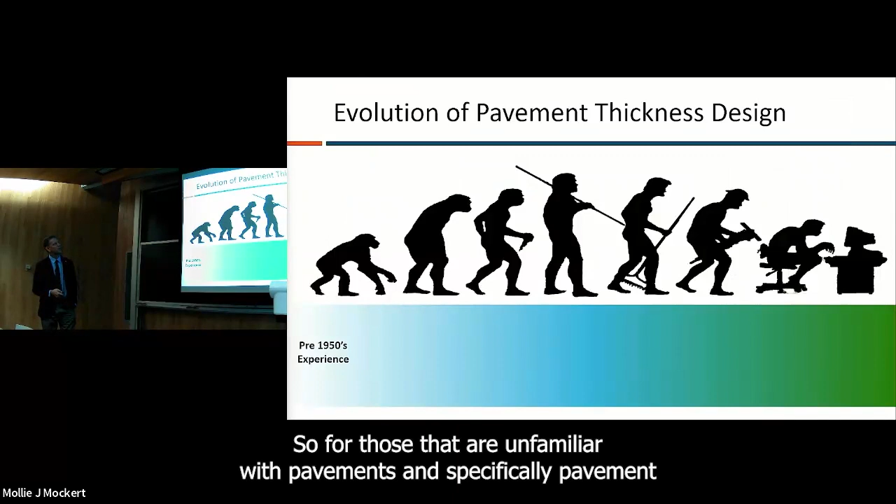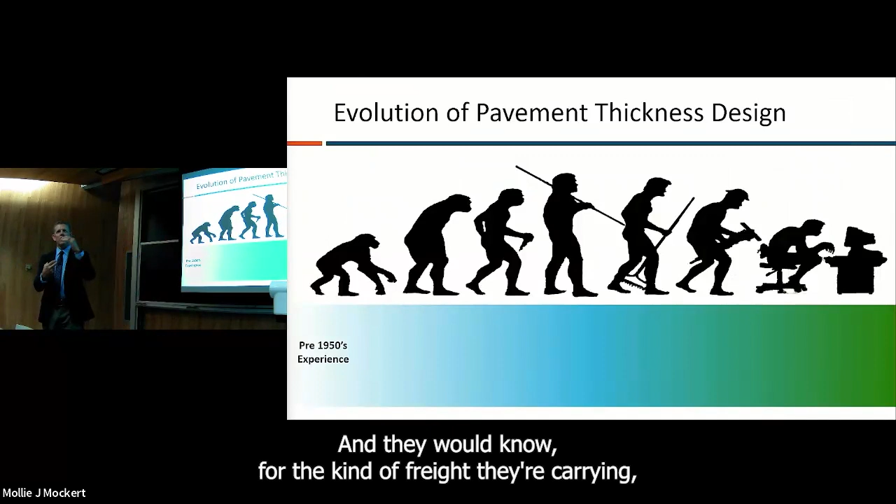For those unfamiliar with pavements and specifically pavement thickness design, we can think of it on an evolutionary scale. Before the 1950s, it was really based almost exclusively on experience. You had local engineers, mostly geotechnical engineers, who had a general idea of their soils and the kind of environment they're dealing with. They would know for the kind of freight they're carrying, okay, we need 5 inches of asphalt over some base material over the soil, and that would probably do the job.

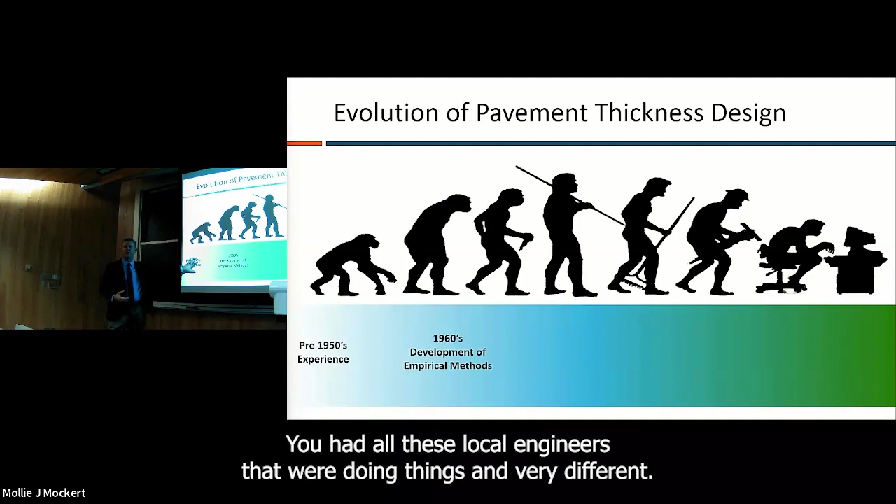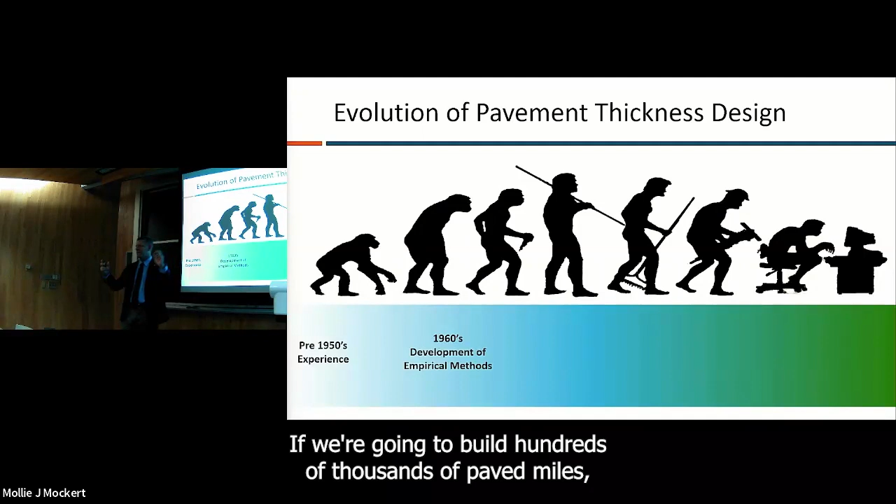Then in the 1950s, we had the Eisenhower Interstate and Defense Act, which paid for our modern day interstate system. And in classic federal government fashion, they had all this money that was going to go into the interstate system, but they did not have a design system. You had all these local engineers doing things very differently, there wasn't a national design standard. So there was a need to develop some kind of design system. If we're going to build hundreds of thousands of paved miles, we need some standard to do it to, and it did not exist when that money was first made available. So there was a big road test, and I'll talk about that in a minute, to help with that.

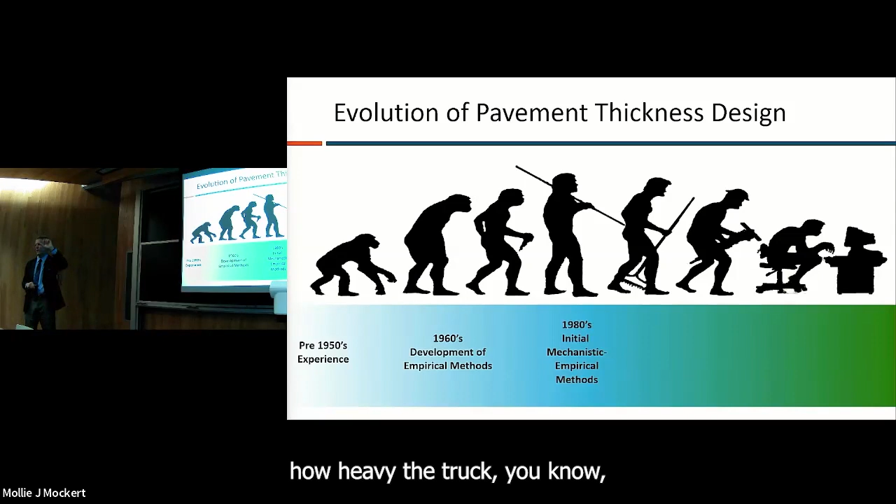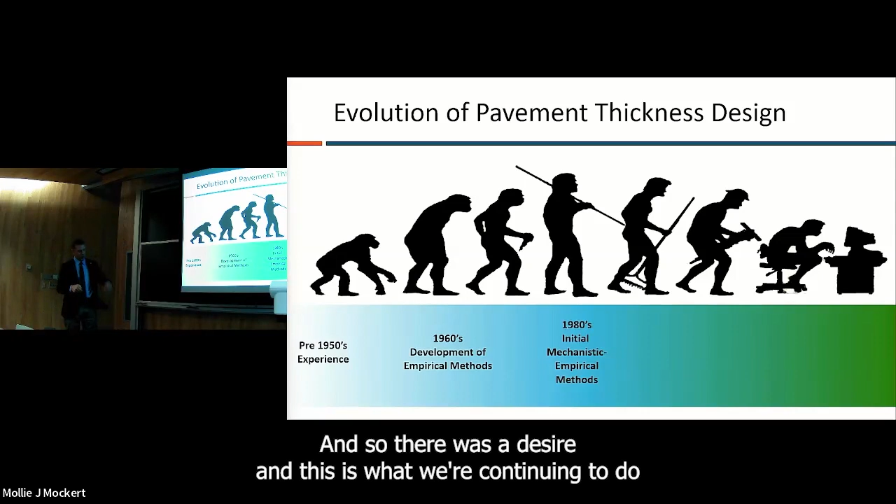Then in the 1980s, this is when Dr. Newcomb comes on the scene, and some of the work he was doing is related to mechanistic empirical design, trying to improve over the strictly empirical models where we just correlate pavement performance to particular parameters, like how heavy the truck is, with just statistical equations that aren't mechanistic, fundamental engineering mechanics type equations. So there was a desire, and this is what we're continuing to do, to develop what we call mechanistic empirical and combine those two things together.

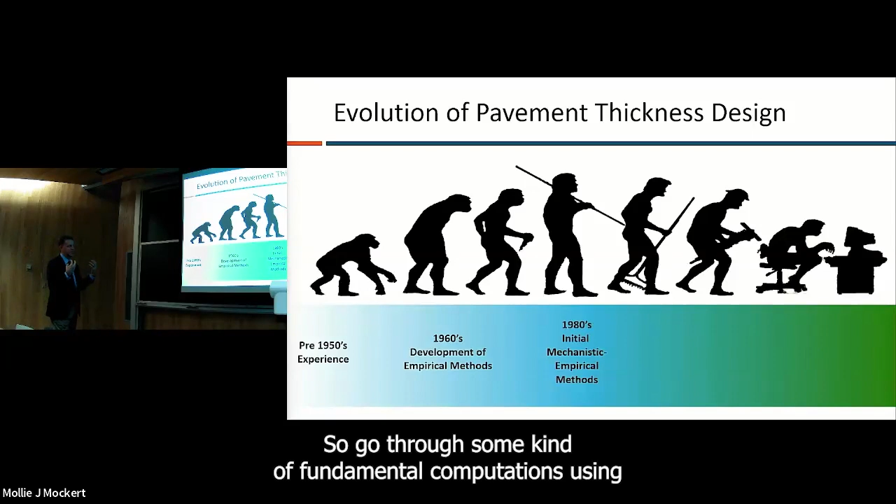So you go through some kind of fundamental computations using layered elastic theory, finite element analysis, whatever it might be, make a computation of a pavement response, and then empirically link that to expected performance: cracking, rutting, potholes, whatever it might be. In the 1990s, there was a big project that NCHRP led called 1-37A, to try to develop the next generation of pavement design, what we call mechanistic empirical pavement design.

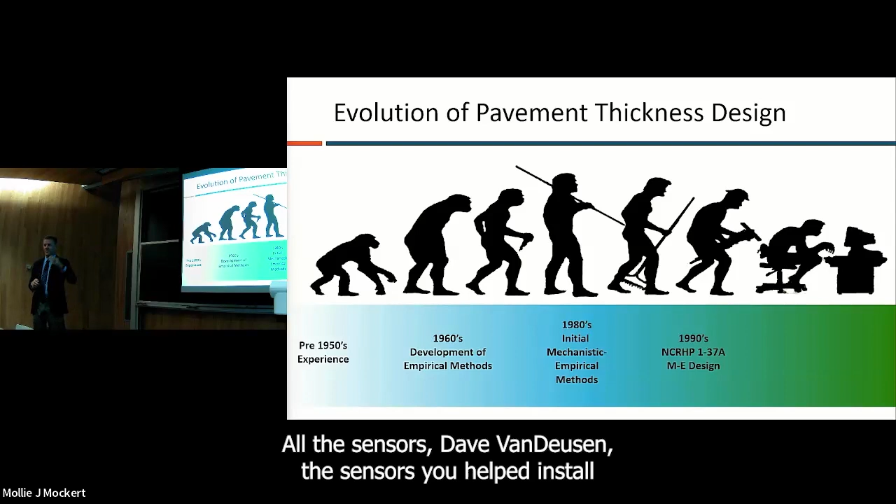That's when I started working with Dr. Newcomb. That's what we were working on, that's what he was working on with the DOT. That was a big effort, mission focus for MnROAD, all the sensors, Dave VanDeusen, the sensors you helped install back in the day. A lot of it was devoted to trying to get a handle on this mechanistic empirical part of pavement analysis, pavement design.

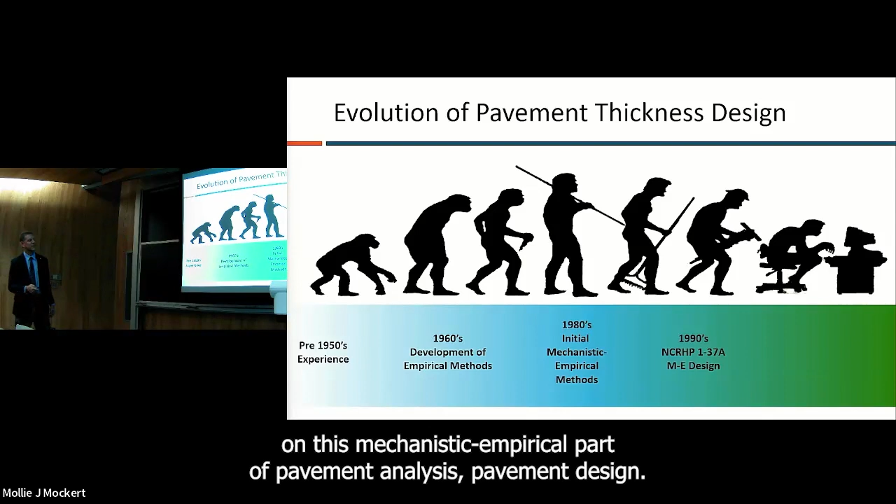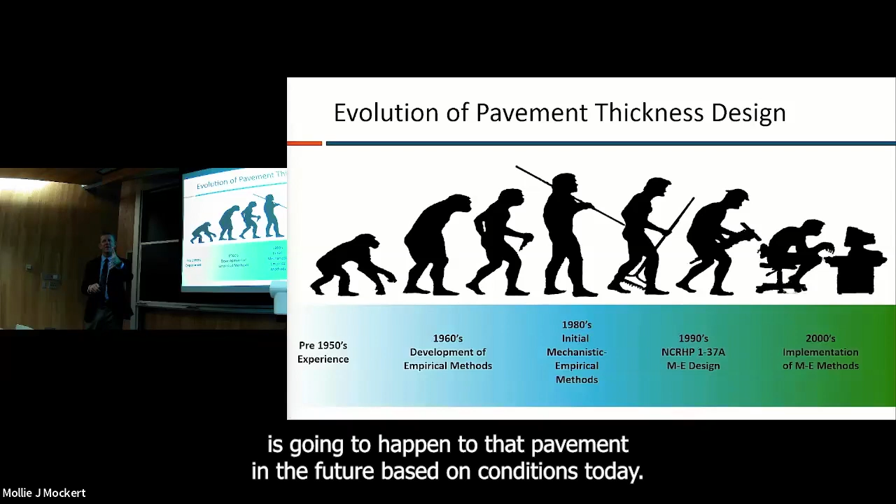And now where we are is we were walking upright for a while, and now pavement designers are hunched over their computers running lots of code to try to make a prediction about what is going to happen to that pavement in the future based on conditions today. And that's where we are. And really much of Dr. Newcomb's career was wrapped up in and around this stuff.

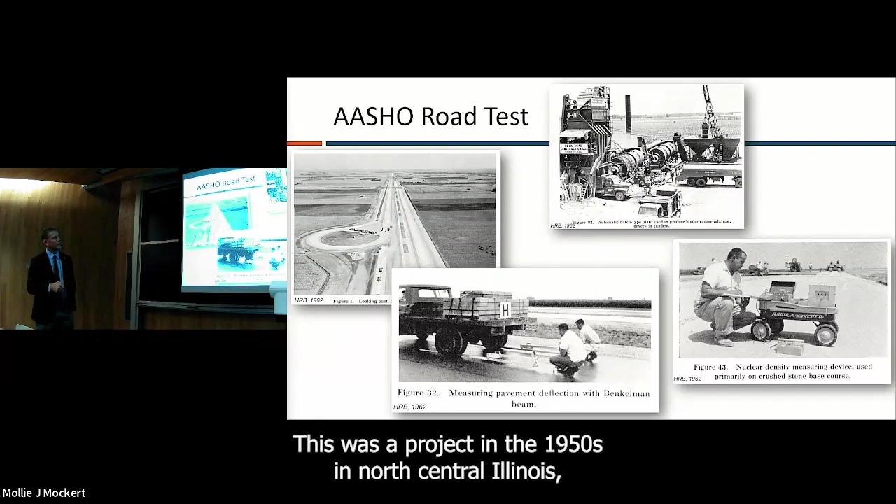So let me talk about the AASHO Road Test. This was a project in the 1950s in north central Illinois. I just have a few historical photos here, some primitive deflection testing. This is a nuclear density test device being hauled around in a child's wagon at the road test.

Most notable for today's lecture is that Dr. Skok was a grad student working for Dr. Kersten, and this is him at the road test. The story that Gene told me one time was his advisor said, 'Hey, I heard about this road test, why don't you go down there and see if you can make yourself useful?' And he didn't know what it was or what he was doing, he just showed up and made himself useful, and it became the design standard in this country for decades.

And he was there on the ground gathering data, looking very sunned and fit, with just a bit more hair back then, but not much. He would tell a lot of great stories about that experience, and I always enjoyed hearing them.

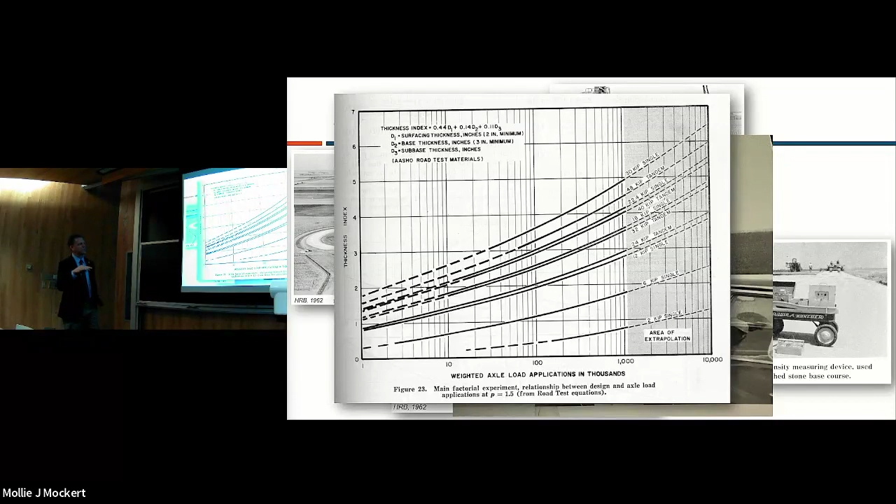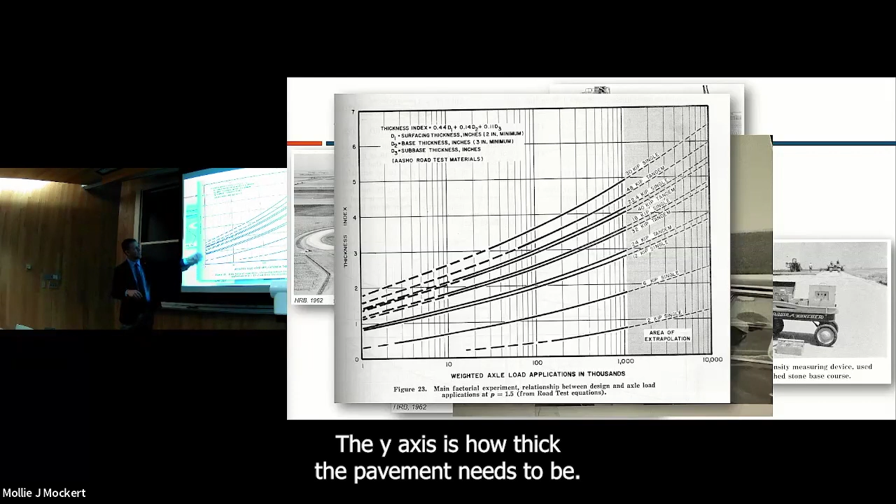What came out of that road test was just a series of empirical equations. A good way to visualize it is on a plot: the x-axis is traffic applications, the y-axis is how thick the pavement needs to be, and the lines are design curves based on how heavy the axles are. It's a beautifully simple and elegant way to design a pavement.

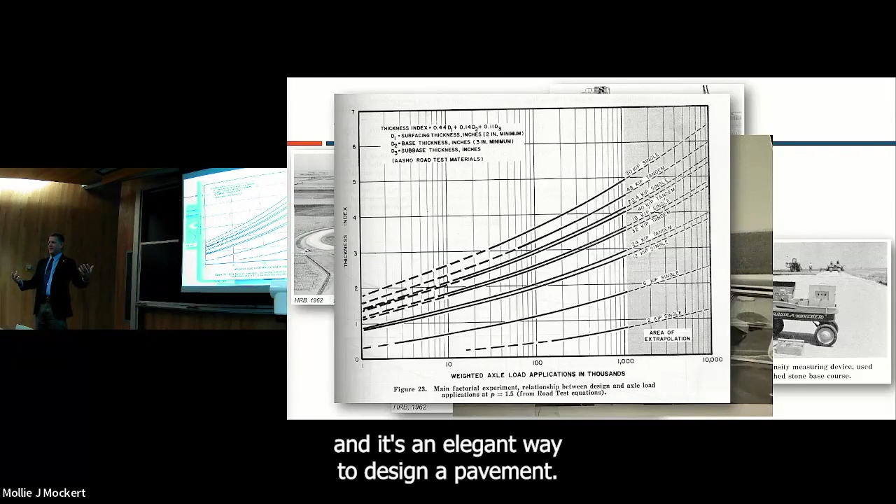What's frightening about it is that past about 1 million, that's extrapolation, and all the dashed lines are extrapolation. There's very little on this plot where we're working within the known sphere of information. So a lot of what we're doing for pavements, if we use that system, is extrapolating.

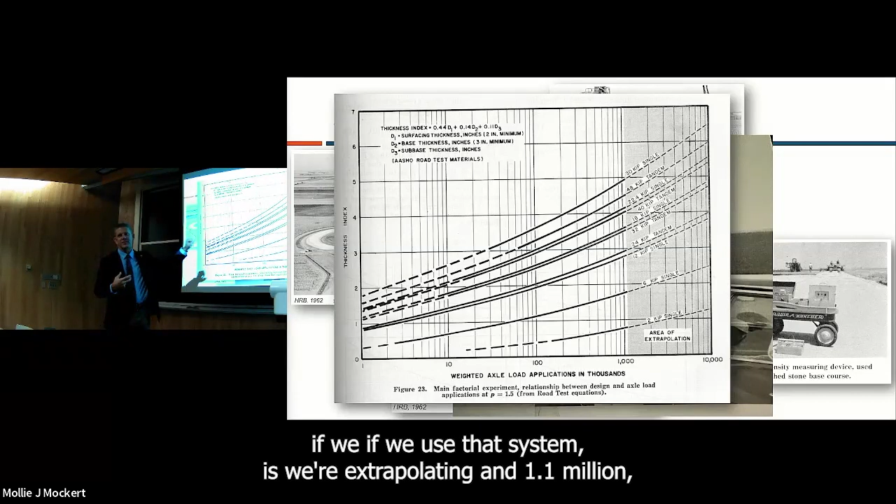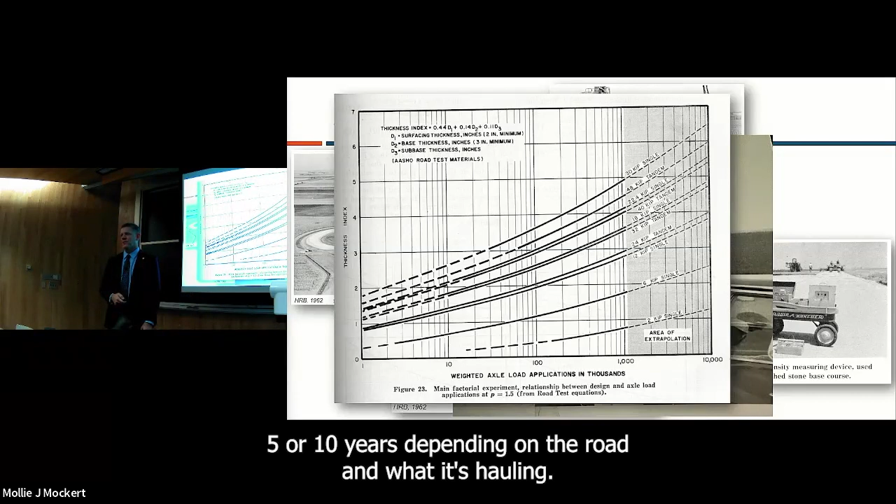And 1.1 million, you can get that in Minnesota on a county road in just 5 or 10 years, depending on the road and what it's hauling. So this was a system we used for a long time, but it's becoming less and less relevant to modern traffic conditions.

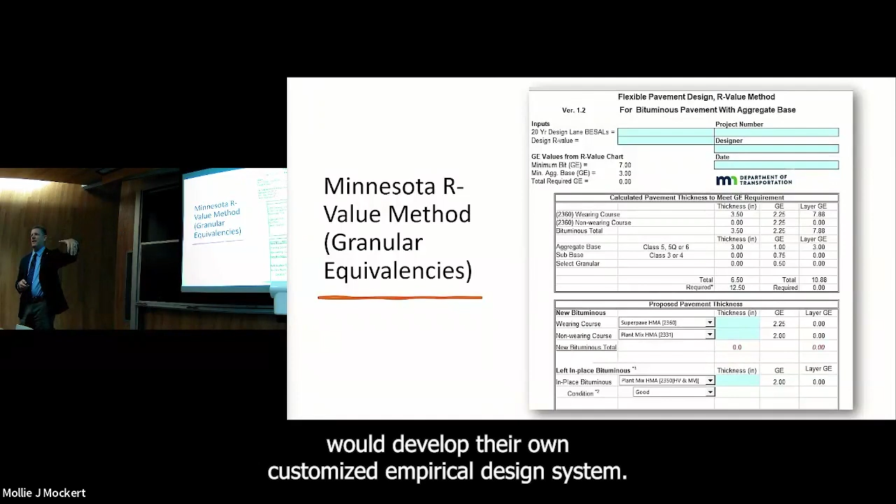One of Dr. Skok's contributions here, as part of this history lesson, is that the intention from AASHO, from the road test, was that every state would develop their own customized empirical design system. The only state I'm aware of that did that was Minnesota. So if you've heard of the granular equivalency method, the DOT people have, maybe some students have, what we call the Minnesota R-value method or granular equivalencies...

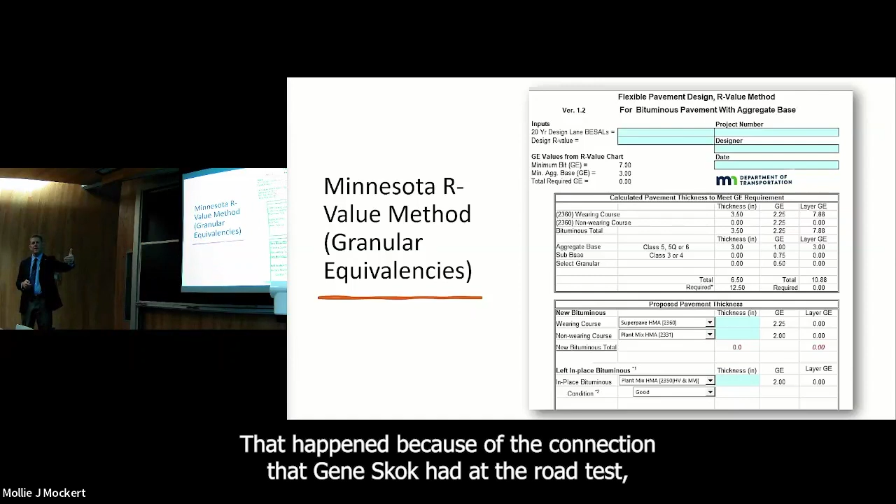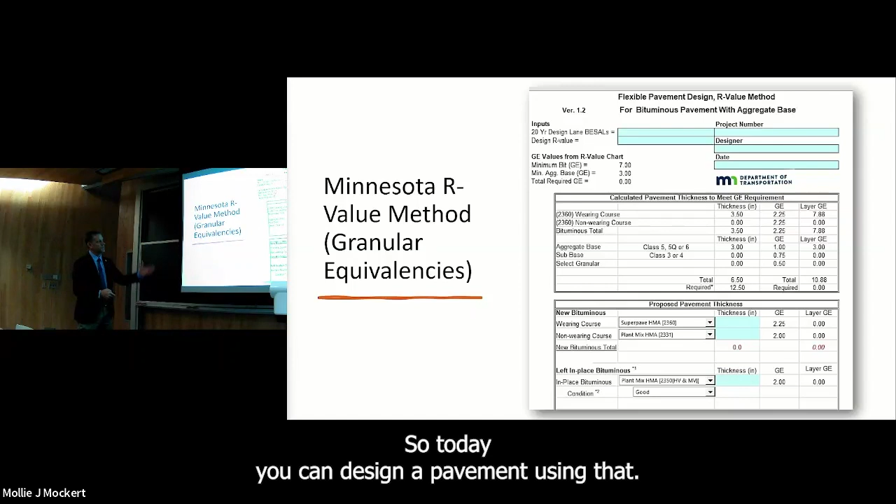This is a spreadsheet you can download and use today. That happened because of the connection that Gene Skok had at the road test, and because he took that mission seriously. He came back and said, we need to do this. So it's a customized system for Minnesota's climate, materials, traffic, all those things. Today you can design a pavement using that.

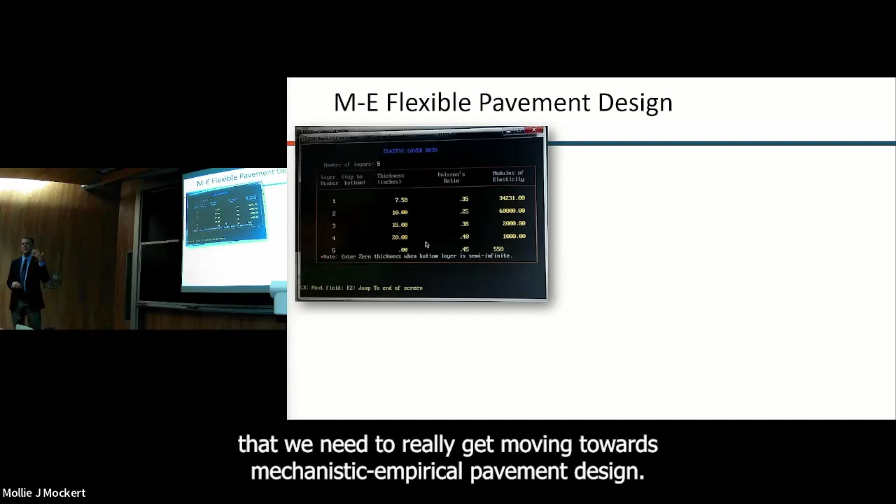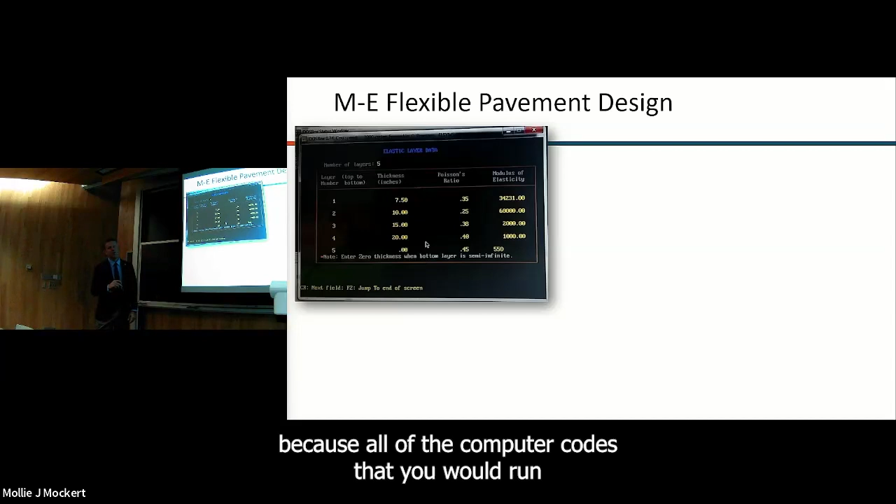Something else that happened in the 1990s, as Dr. Newcomb was getting going here, was this idea that we need to really get moving towards mechanistic empirical pavement design. The mechanistic part of it in the 1990s was a bit challenging because all of the computer codes you would run were like in an old DOS window. It was all command prompt.

I know the younger people maybe have never experienced this, but some of us older people remember very well - it would run in windows like this, all command prompt. It would say, how many layers do you want to simulate? There's a flashing cursor. You'd hit 3, enter, and the next question comes up: what is the modulus of layer 1? And you'd enter all that stuff.

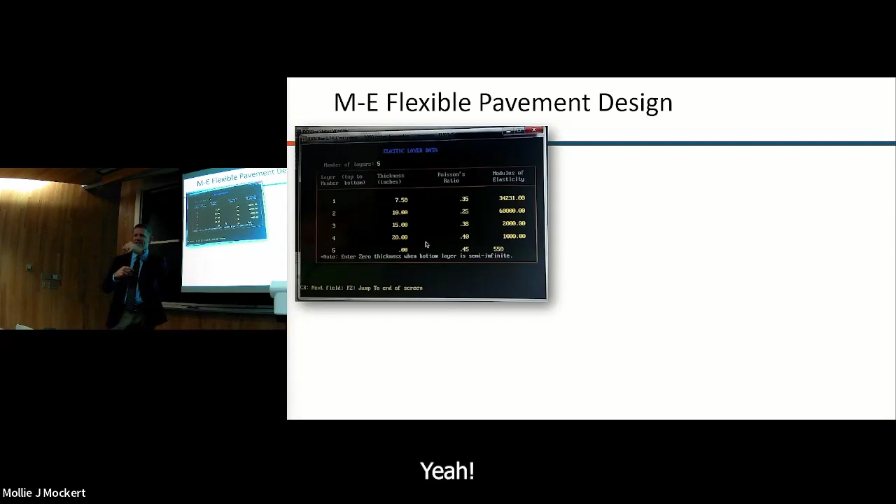We put on a short course for the DOT in the computer lab. I don't think anybody in this room was there, maybe - you were there? Yeah. We used ELSYM5, that's what this program is, layer elastic analysis. The course went great. I was just a student working as a teacher's helper that day while Dr. Newcomb taught the course.

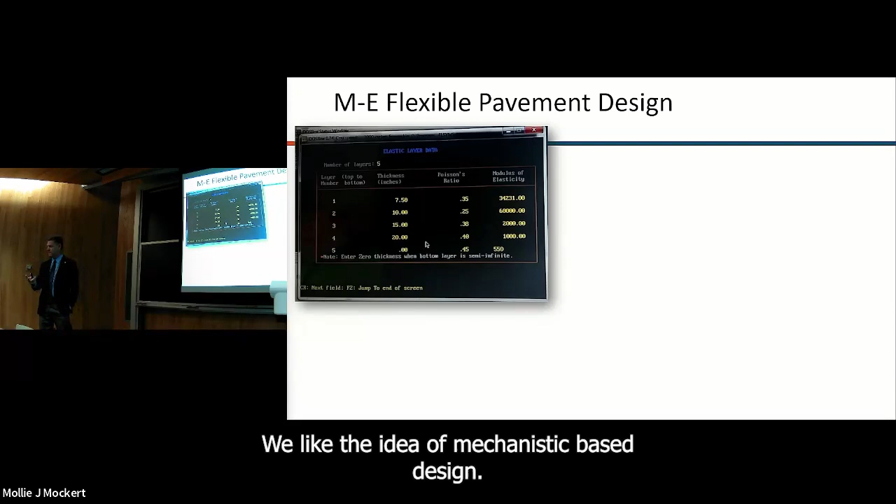The feedback that we got on that course was, these are all great ideas, we like the idea of mechanistic-based design. However, it's 1995, it shouldn't look like this, right? So we went back to Dave's office a few hours later, or the next day, I don't remember.

And he said, well, we need a Windows-based program to do this. And I said, that sounds great. And then he said, you don't get it, do you? I said, what do you mean? Well, you're going to create that. And I said, well...

I've never taken a computer programming class. I had the computer applications class - Dr. Barnes taught it to me. We learned how to use Quattro Pro. Anybody heard of that before? A few people, not many. He'd trundle in a computer on a cart and plug it into the system, and we would take notes as he's doing things in the Quattro Pro spreadsheet. That was my knowledge of computing at that time.

And so he said, well, don't worry, the bookstore is nearby, go get a few programming books and teach yourself how to do this. And I said, okay, because he told me to do it. So I did that - I went over to the store, I bought, I think, 2 books. We were on quarters back then for winter quarter, whatever year it was. I don't know if Jenny remembers that, but remember the books.

So we put this program together, and now that I'm in a department chair's position, I realize we probably should have asked permission before we just used it—I don't know how many copyrights we violated. I'm sure athletics would not be happy that we didn't get permission. But we put this computer program together, and it's something I continue to use today in my own teaching. It's basically a Windows version of what's sitting behind there.

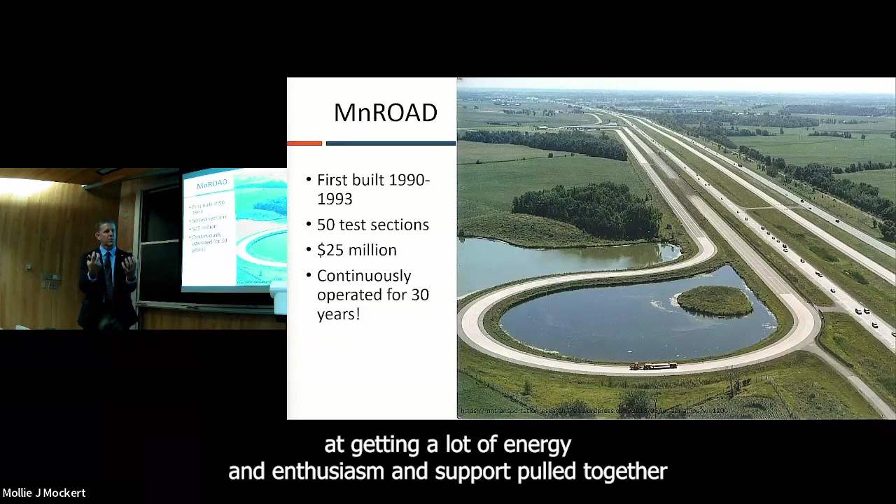When it was first built, there were 50 test sections, $25 million in the early 1990s. And this is just amazing, that it has run continuously for 30 years. A lot of agencies and universities are really good at getting a lot of energy and enthusiasm and support pulled together for a very short time. Projects will start and close, you might run it for just a couple of years and then things move along. The fact that it's run for 30 years is just tremendous. I'll talk more about that in a minute.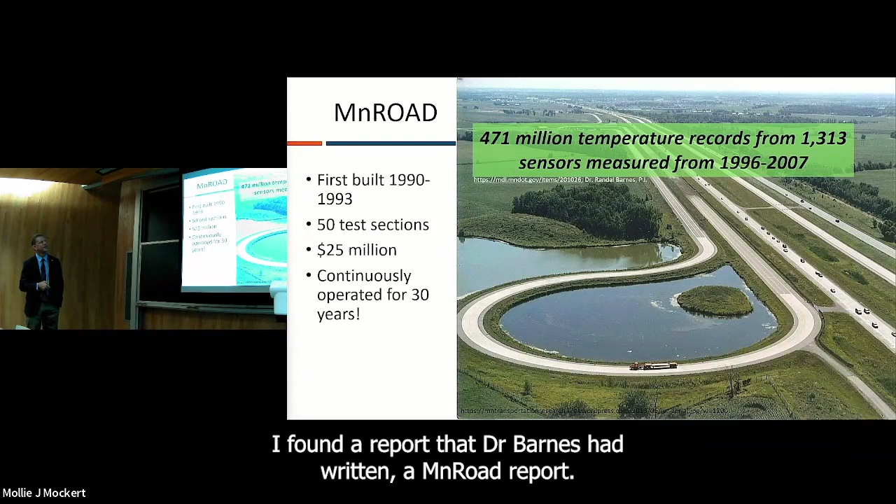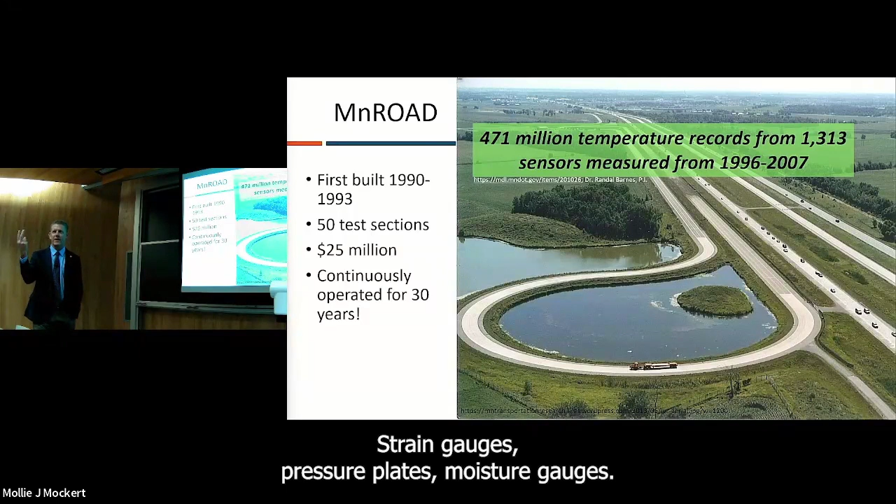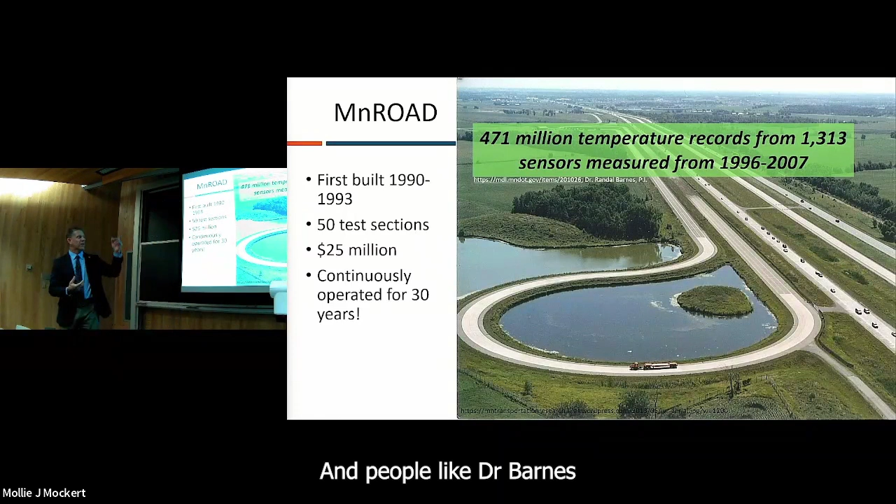To give you a sense of the scale, there's a lot of different ways to measure it. I did a quick Google search and found a report that Dr. Barnes had written, a MnROAD report. In that report, he evaluated 471 million temperature records gathered from 1,300 sensors over about a 10-year period, and that's just one sensor type. There's strain gauges, pressure plates, moisture gauges. It's terabytes of information. And the job of academia is to take that data and turn it into knowledge, right? People like Dr. Barnes and others, Dave Newcomb certainly included, that's really the challenge, to take all that data and turn it into knowledge that practitioners can use.

And there were a number of very important people, some of them are in the room today. Glenn Engstrom was really a key partner with Dave. He always talked about you that way, that you guys were co-conspirators, collaborators, partners, friends in that effort. It is a monumental effort to keep something like that operating, and it has a very large impact.

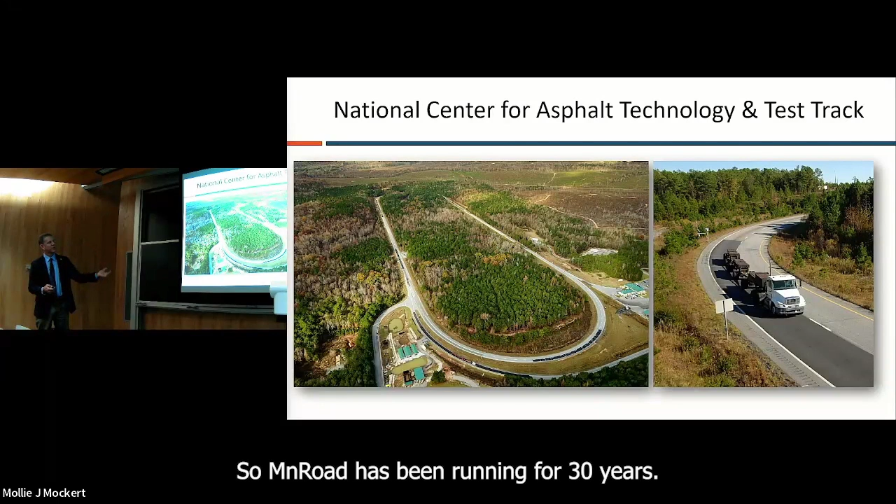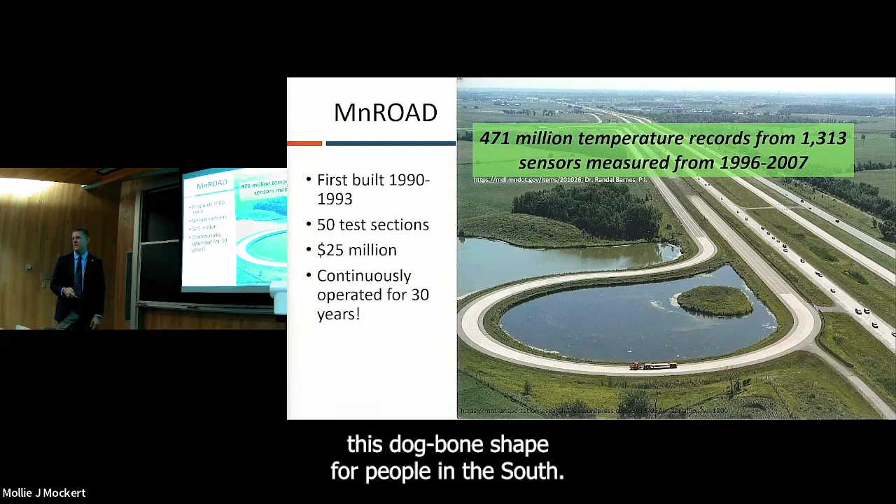So MnROAD's been running for 30 years. I got to Auburn in the early 2000s, and I had nothing to do with creating this, but I've been able to reap its rewards for about 23 years. We operate a test track. We're in the deep South, and there's a lot of laws and things, it has to be an oval, it has to be a left-hand turn. I'm kidding. But none of this dog bone shape for people in the South, it has to look like a NASCAR racetrack, basically.

Okay, but it's a little bit different. We send our trucks around in circles. These guys are driving, there's two shifts, they run 16 hours a day. As a team in two years, they make 1 million laps around that facility. You can see all the various test sections around here. They just go round and round, 26 laps an hour. We've got a lot, it's really a civil engineer's playground.

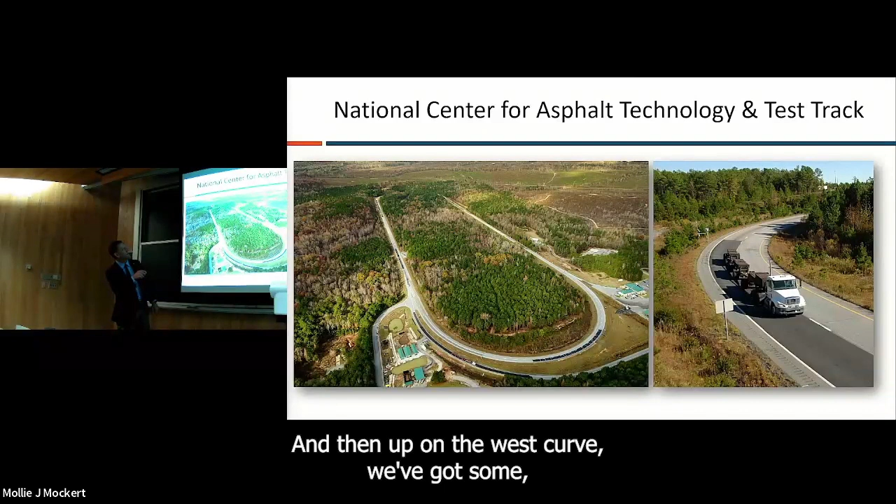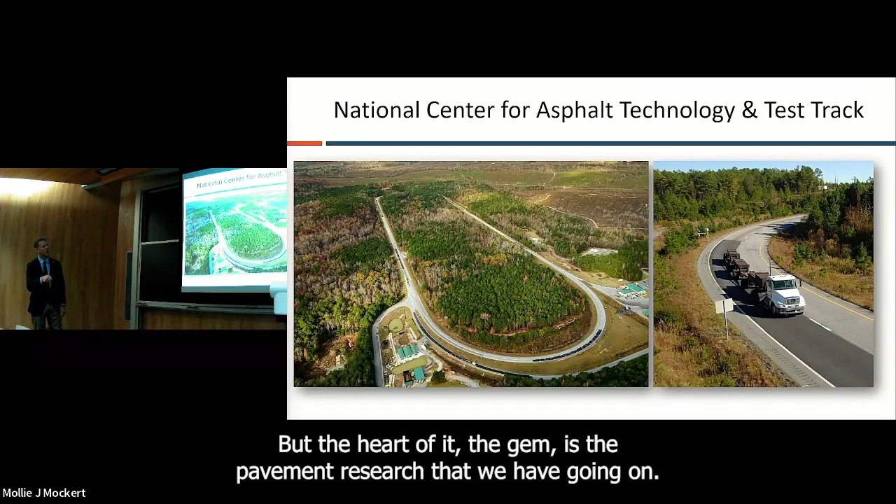We've got a lot of other cool things going on. There's an erosion sediment control test facility here, a national geotechnical test site, and up on the west curve there's an off-road course for our Baja competition team at the site. So there's a lot of really cool stuff going on, but the heart of it, the gem, is the pavement research that we have going on.

And there are a lot of things we do there now that really predate the partnership, I'll talk about the partnership in a second, things that I learned from the MnDOT people, from being here working with Dr. Newcomb, that I was able to bring and implement at the test road.

I also like to say that I'm part of a long-term trade. I went south in 2001, and then Mike, what year did you come here?

2017. So it was a very long future prospect trade, but Mike was one of my PhD students that worked on the test track, and he's one of Dr. Newcomb's academic grandchildren. I don't know if you guys ever met him, but I know he took that academic family very seriously. He would talk about his academic children, his academic grandchildren. He liked to trace the lineages, and Mike is of the line of Newcomb, which is a big deal.

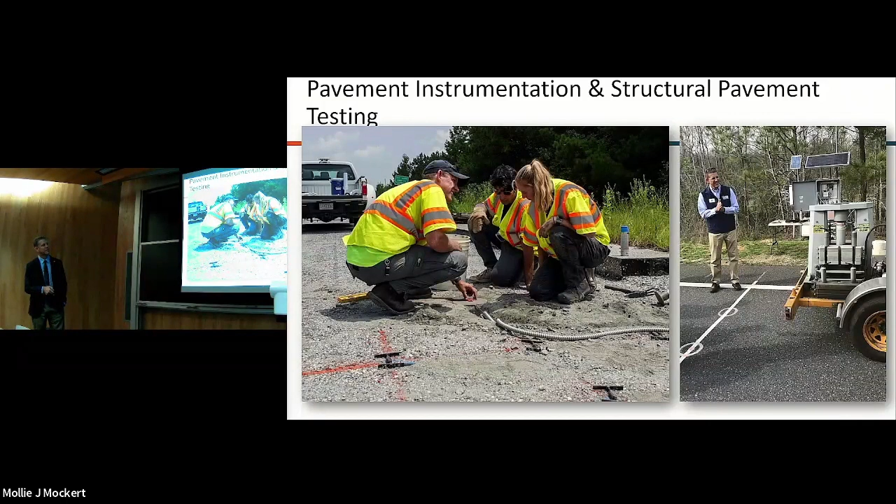Some of the things that we do at the test track that were done at MnROAD first, putting instruments in the pavement, training, working with students, that's a big deal. FWD testing, this is out on our test road. One of the great features is that it's a remote location, so we don't have to deal with live traffic, that kind of thing.

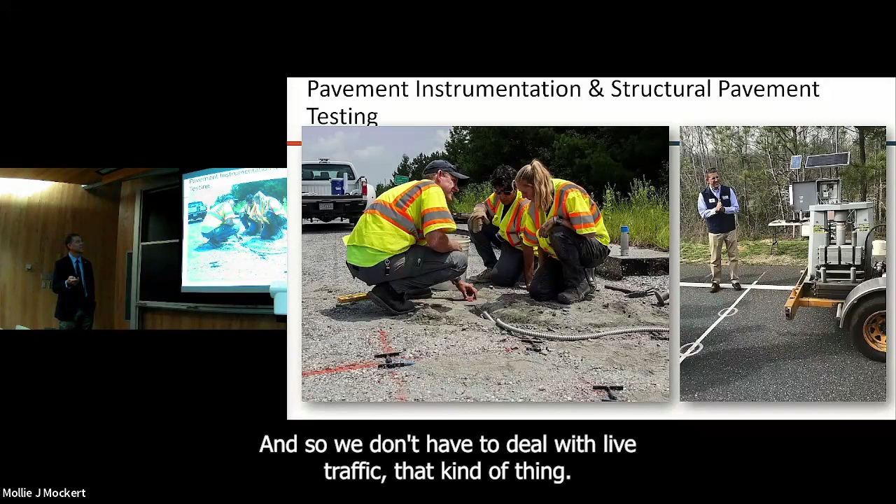Let me move on to perpetual pavements. I know I'm running short on time. Of all the things that I got to work with Dr. Newcomb on, we probably worked together most on this. It's had a big impact on the industry. In 2001, he helped pull together a transportation research circular, with 3 authors on the lead article. He was the lead author, along with the Asphalt Institute and state associations. In it, they laid out the framework for long life pavement design, which at the time people weren't talking about much. They laid out a framework for this notion that perpetual pavements exist, and this is how we should design them.

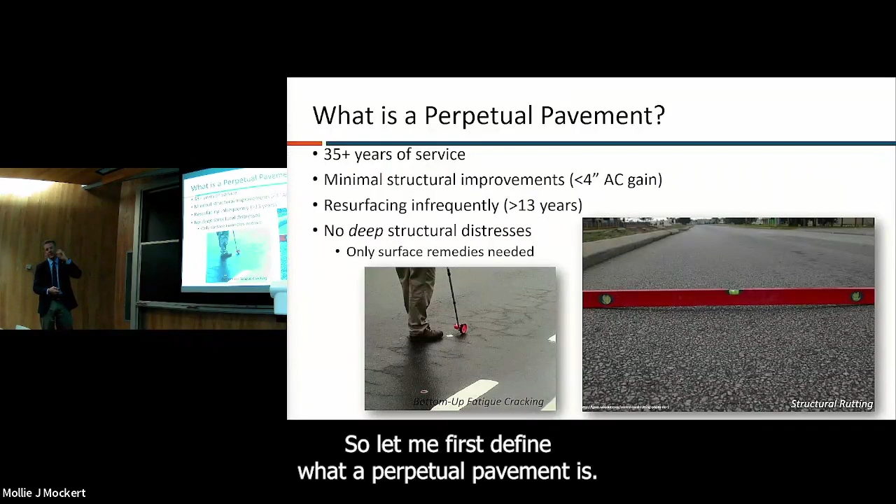So let me first define what a perpetual pavement is. Number one, it is long lasting, so 35 years, with minimal structural improvements, infrequent resurfacing, and no deep structural distresses like you see here. We want to avoid those things. We want to avoid bottom-up cracking, and we want to avoid deep structural rutting. If we do that, we have achieved a long life, or a perpetual pavement.

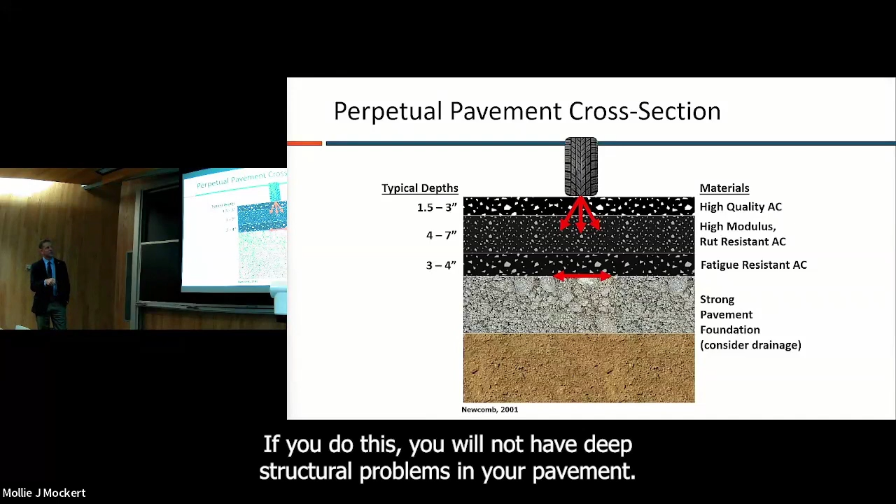This figure that Dr. Newcomb put together in 2001 has had a lasting impact. In it, he describes what a typical perpetual pavement should look like, how thick it should be. If you look at the thicknesses here, on the thin side you're at about 8.5 inches, and the thick side is 14 inches, so just keep that in mind. High quality material, strong pavement foundation - if you do this, you will not have deep structural problems in your pavement. It'll be long lasting.

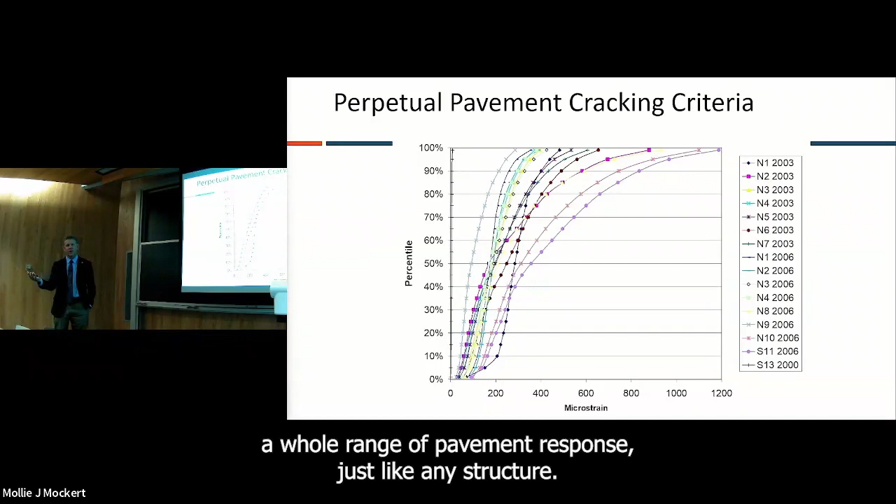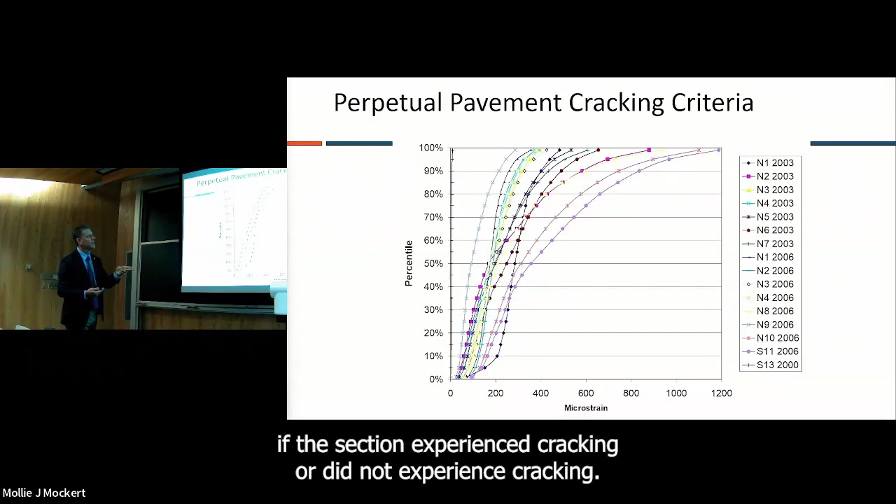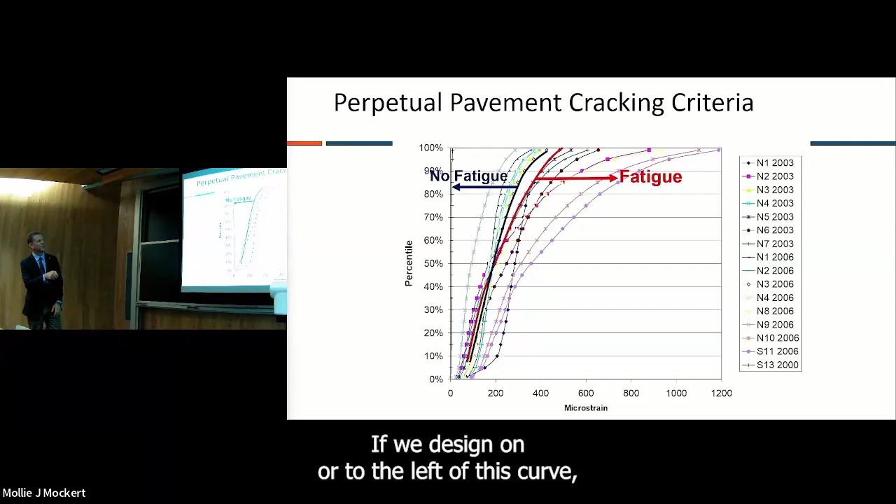Jump forward a few years to work we were doing at the test track, and this gets into some of the reliability ideas that Dr. Galambos first taught me about. A pavement will actually experience a whole range of pavement response, just like any structure. Each curve on this plot represents a different test section at our track, and it's just a big jumble of curves until you know if the section experienced cracking or not. Remarkably, everything on or to the left of that blue line did not experience bottom-up cracking over multiple test cycles at our track. Everything on or to the right of the red line did. So that kind of curve gives us a means to design a long life perpetual pavement. If we design on or to the left of this curve, we're not going to have bottom-up fatigue, and that today forms the basis of modern day flexible pavement perpetual design.

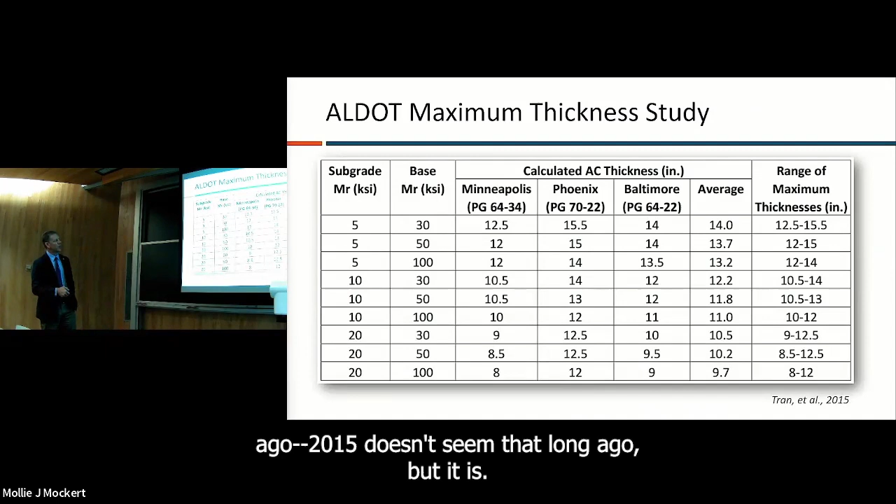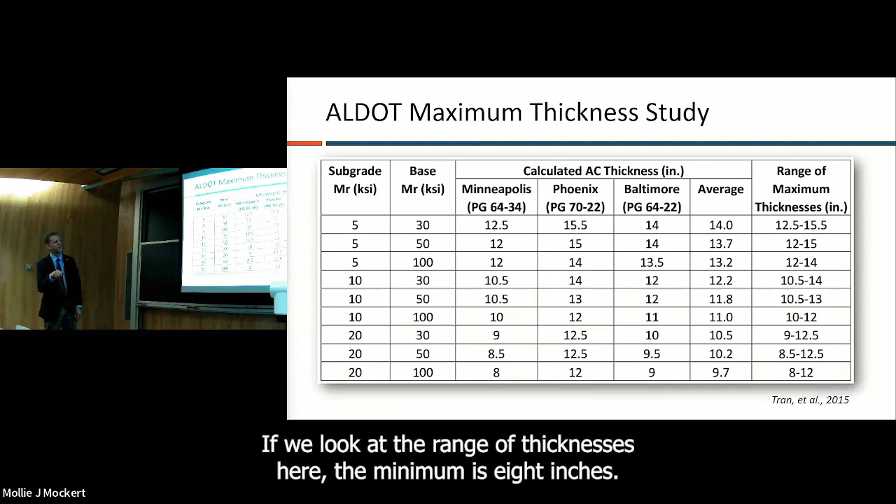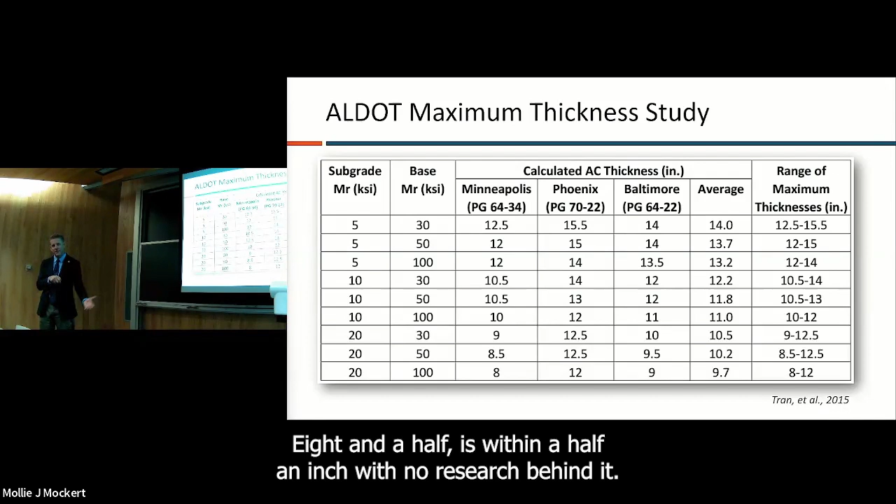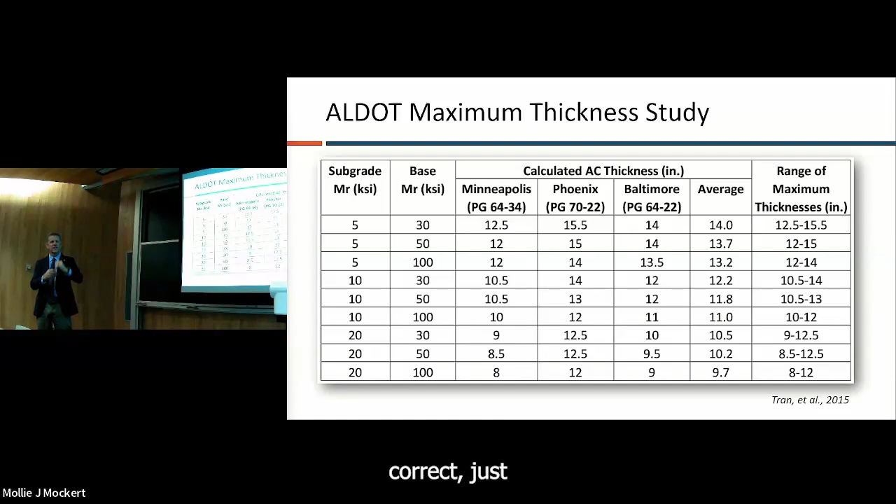Using those ideas, back in 2015, we did a sensitivity analysis. There's a lot on this table, but let's just focus on that we have different sets of conditions, different climates, and so on. If we look at the range of thicknesses here, the minimum is 8 inches. What was the minimum from Dr. Newcomb's figure? 8.5. He's within half an inch with no research behind it. And the maximum is 15.5, while he topped out at 14 - we're being a little more conservative. So 15 years goes by, lots of research, lots of study, lots of analysis, and he hit it about 90-something percent correct, just based on his gut engineering sense from having been in the industry so long. It's a remarkable feat, to say the least.

Today, there's the Perpetual Pavement Award Program, with 3 different categories. There have been 164 existing pavements recognized around the U.S., and the color coding shows that the darker the orange, the more awards they've had.

Tennessee and Minnesota are running neck and neck. Minnesota has 16 perpetual pavement awards, and that's a testament to the work by MnDOT to select materials properly, specify them properly, and build the pavement to last. All those things go into having a lot of perpetual pavements in this state, and likewise in others.

But what's remarkable is that it's not just in one location. We have them in Alaska, the Southwest, the Pacific Northwest. They're all over the country. They are not unique to a particular location. These exist, and we should design them—that's what this whole effort is about, helping people design long life perpetual pavements.

So back to the software, it was really great that he asked me, or commanded me, to go learn how to program, because I've used it many times in my career. So ROADENT—one path went to MnPave, and the other path became what's now the industry standard called PerRoad, which was born out of ROADENT.

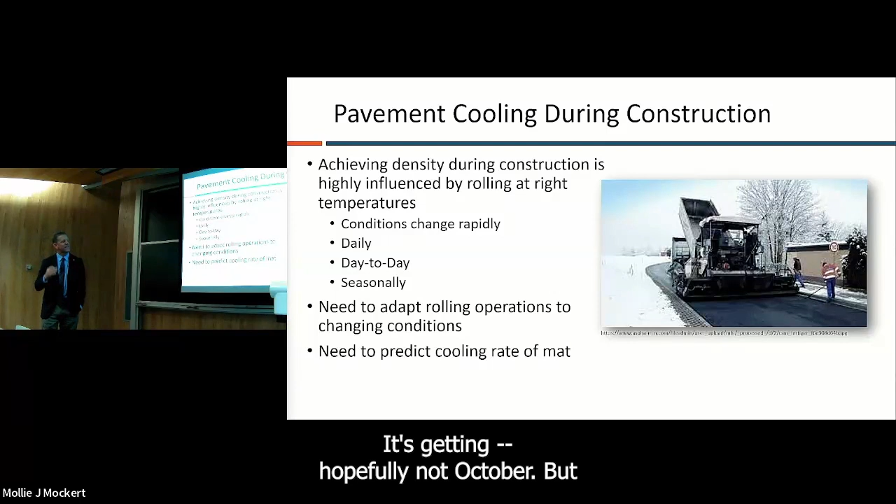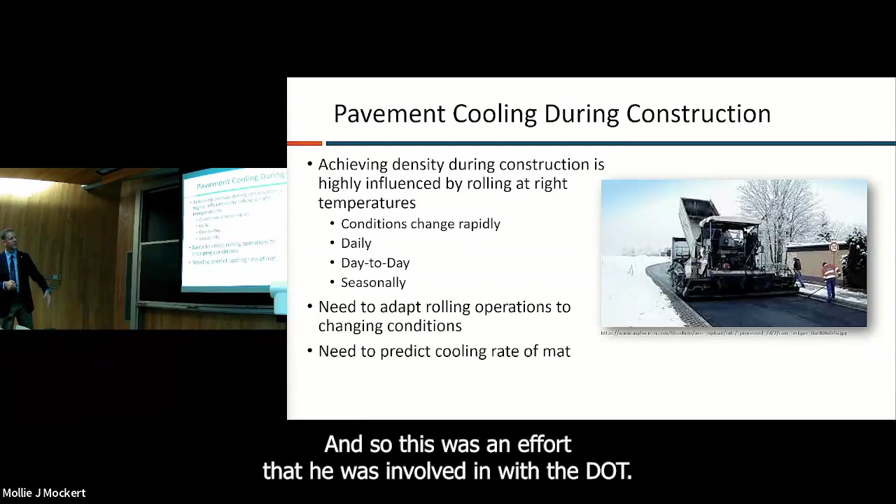We need a way to understand how conditions on the ground are changing, so that a paving crew used to paving in July, with all the time in the world to achieve compaction, can understand how much faster the pavement is cooling when it comes out the back of the paver under the screed. There are a lot of things that affect it, and the idea is you need to adapt the rolling operations. All the work we do in the lab, specifying materials, can just disappear if we don't compact it properly. So this was an effort he was involved in with the DOT—this idea that we need to predict the cooling rate of the mat.

I know I'm at the University of Minnesota, and I know I need to show at least a couple of equations, so here they are.

We got involved, and Bruce was involved in this too—he and I were involved, and this was at the very beginning of me being able to program. Dr. Voller was really the lead mathematician on this. We had to solve a very complex problem where you have convection occurring at the surface of the pavement when it's hot and first laid, along with radiation and solar effects. Then through the depth of the structure, you basically have Fourier's second law, but it's occurring across all these different kinds of materials, so it gets very complex in terms of heat capacity and thermal conductivity. It's a very complex problem.

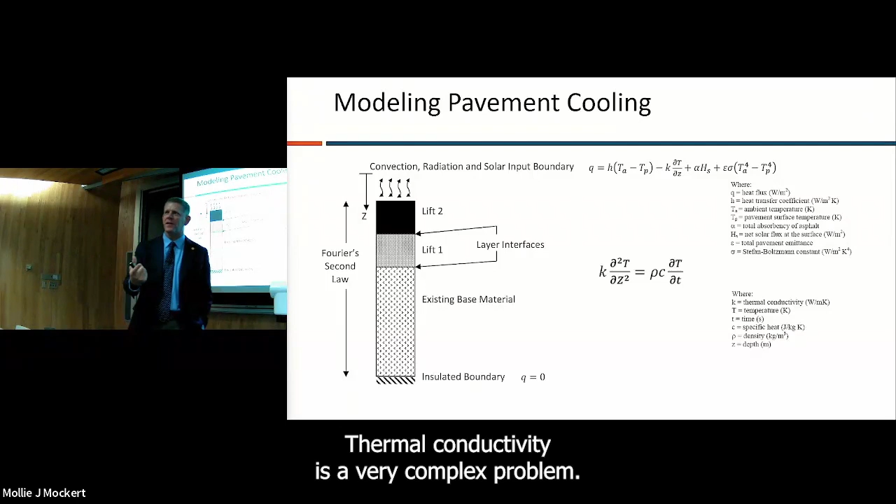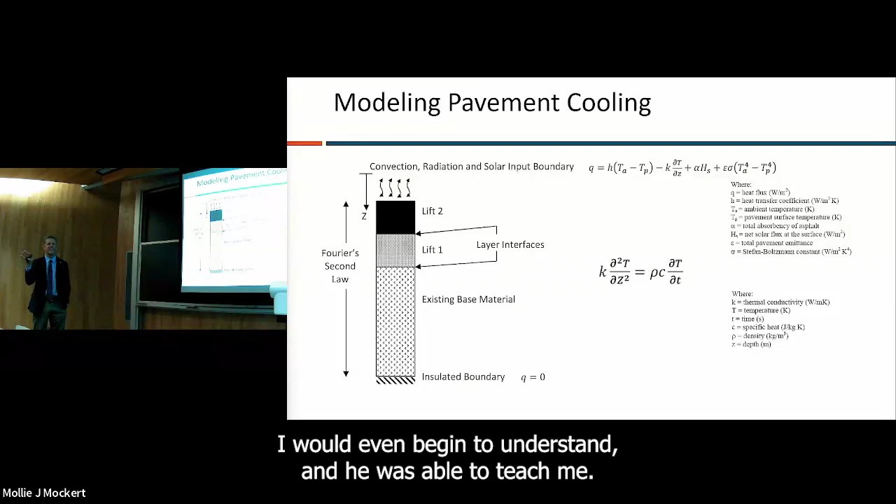The way Dr. Voller helped us solve the problem was to use a finite difference moving boundary condition—words I never thought I would begin to understand. He was able to teach me; I'd never taken a heat transfer class and had to learn it directly from the master. It was a really interesting project, and I'll also point out that Dave had a really unique way of disarming and making information accessible.

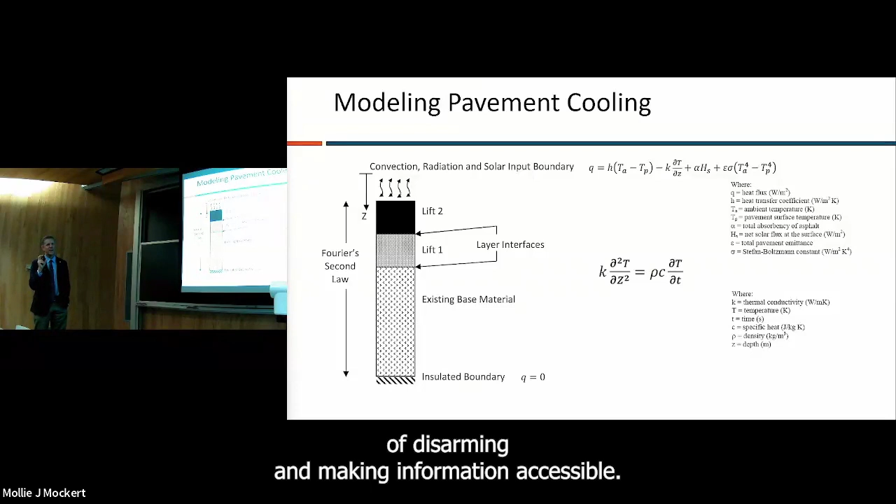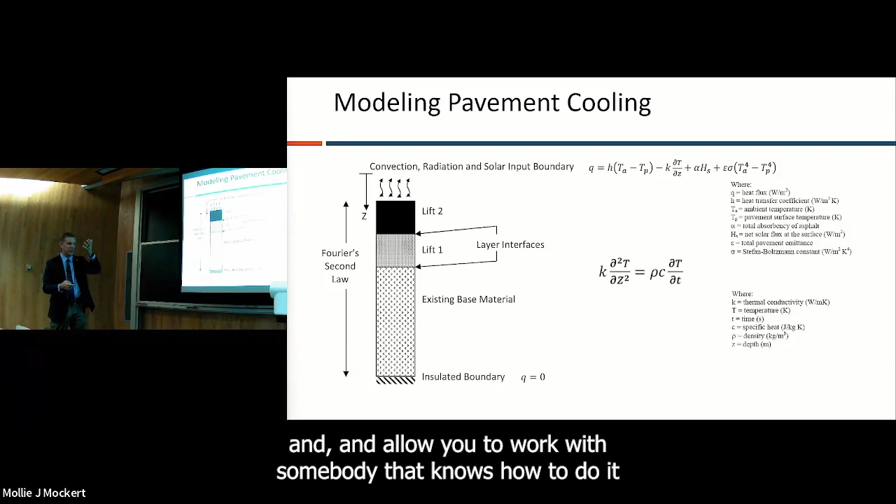I used to panic when I would see things like this, and maybe some of you in the room don't panic, but you see equations like this. He would have a really fun way of disarming it. He's like, well, that's just a couple of backward sixes, and I don't see any upside down triangles, so it's gonna be okay. Go talk to Dr. Voller and he'll help you solve it. He had a way of taking those really intimidating things and stuff that you'd say, I can't do it, I don't know how to do it, and disarming it, allowing you to work with somebody that knows how to do it, and then put together some computer code to solve the problem.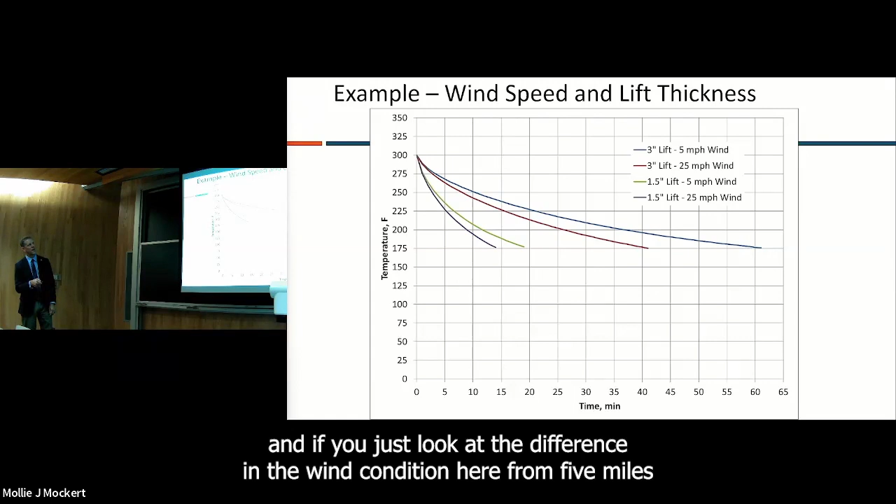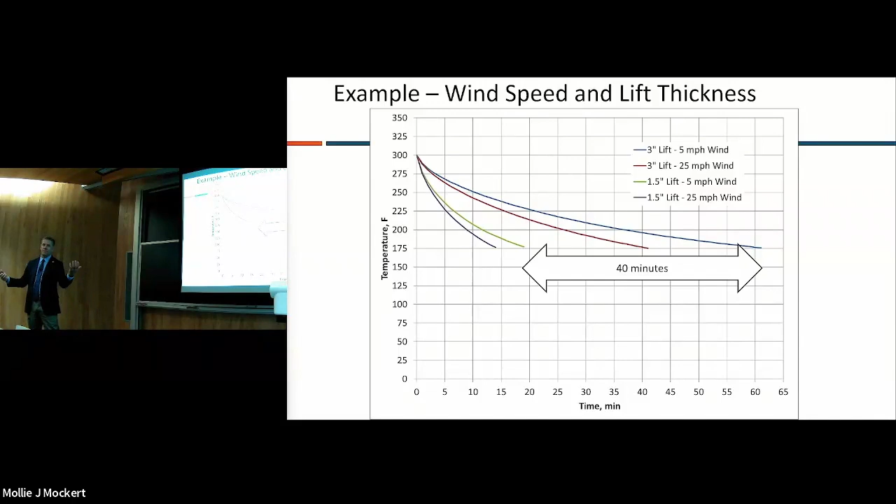So this is just an example. If you look at a set of conditions, 3 inches thick that you've laid, and the difference in wind condition from 5 mile an hour to 25 mile an hour, if you're on a paving crew you lose 20 minutes just from that wind speed change. That could mean the difference between a project that meets specification and one that doesn't, or one that makes bonus and one that doesn't. If you go from a 3-inch lift to 1.5 inches with the same wind condition, you now lose 40 minutes. It'd be nice to know that before you're out on the paving job. Maybe you have more rollers, maybe you move them closer. There's all kinds of real practical things you can change to improve that condition.

So the very first edition of this was PaveCool 3.1, a Windows program with some graphing components. You feed in all this information and it would give you a cooling curve, and it would tell you when to start rolling and when you can stop rolling, and the difference there is the amount of time you have. Years after we created PaveCool 3.1, we moved it to what we called CalCool 3.0.

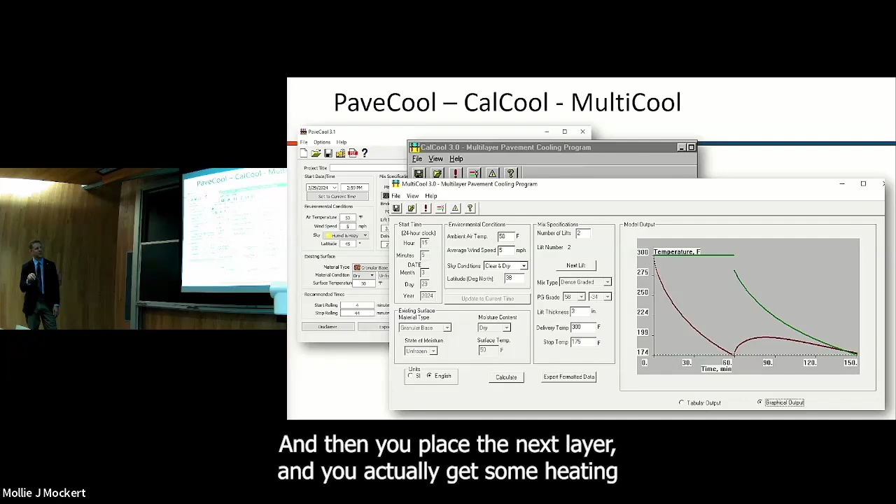This was a project for Caltrans where they wanted to look at multi-lift situations. So let's say we pave it and we want to know how quickly it's going to cool, pave the next layer, and so on. So we developed that, and from that you get a multi-layer simulation. This should make intuitive sense: that first layer goes down, it gets down to a stop temperature, and then you place the next layer and you actually get some heating of that material as conduction takes place across that boundary. It was just a matter of applying those basic concepts, writing up some finite difference computer code. I say it like it was easy, but it was very difficult.

And this, we now call MultiCool. This is now used in the industry. We have since created it, you can get it in the Google Play Store. I say this like I did it myself, I had a grad student do it. You can get it in the Google Play Store, mobile, web browser, Windows.

But basically what we wanted to do, and again this is in the spirit of Dave's mission, was put that information in the hand of the engineer that's on site, that is, the snow is flying, the wind is howling. What do they need to do differently so that this project doesn't have to get torn out next summer? These kinds of tools help us achieve better, longer lasting, lower cost, more efficient use of tax dollars, all of those things.

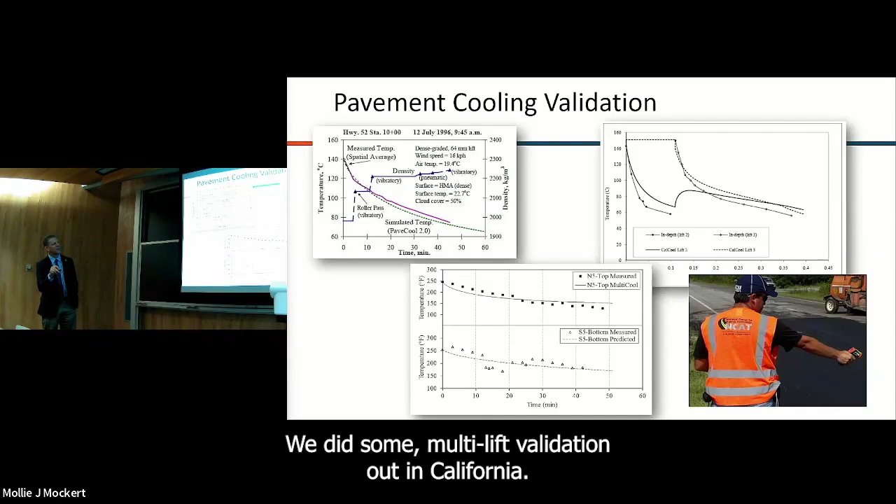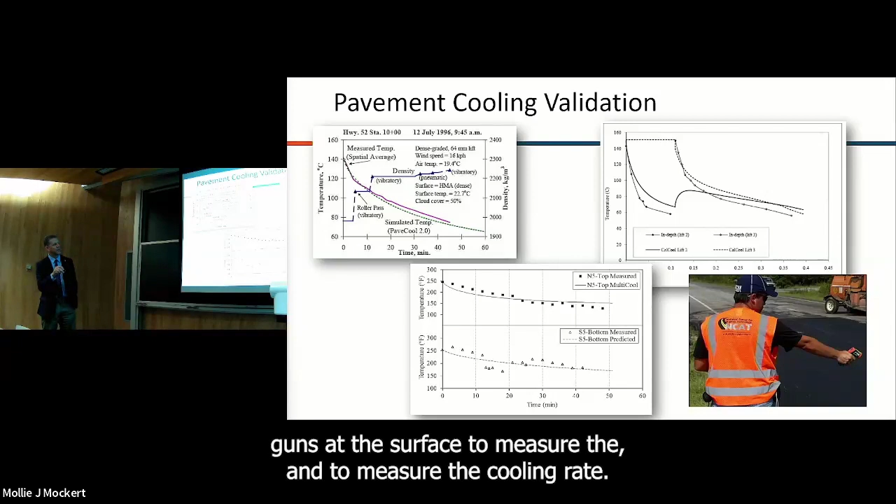We did some validation work, and this was some of the initial validation stuff. Bruce, I think you were involved in some, you maybe gathered some of that data. You can see a nice match here between the predicted cooling curve in purple and the measured, and then we had some information about the density as it was being compacted. We did some multi-lift validation out in California, and then this we did at our test track using temperature guns at the surface to measure the cooling rate, and it's kind of proven itself out time and again.

So I guess Fourier was right when he wrote those equations. I wouldn't argue with him. I wouldn't know how to argue with him, but...

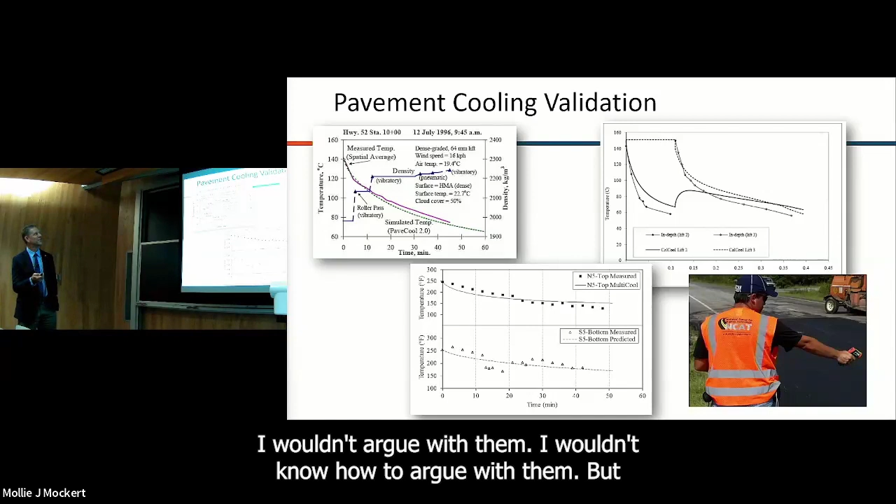So let me talk about the partnership test sites. This may be the only time you think of Alabama and Minnesota in the same thought. We're often on opposite sides of many different things, but in this case we're partners trying to tackle some really important problems.

If we look at temperature data, interestingly, in the South we actually have a low temperature in 1985 recorded at -7. This is end-of-days kind of stuff. I know that's just a February morning here, but for us that's like bring your family together, buy all the toilet paper you can—this is not going to end well for anyone.

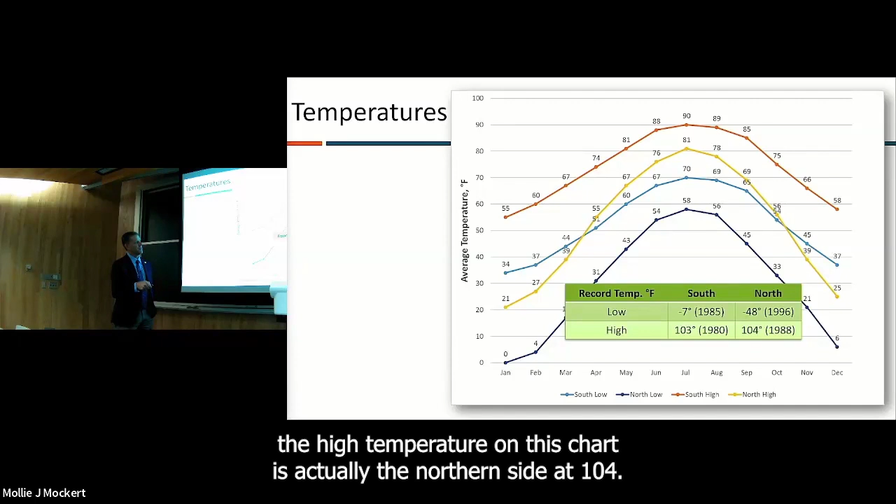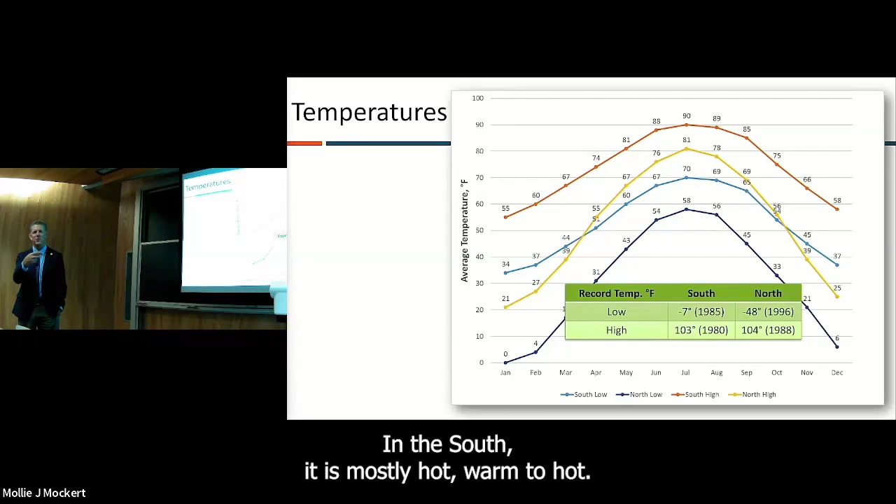Also interestingly, the high temperature on this chart is actually the northern site at 104. The conditions you all have here are way harder to deal with from a civil infrastructure perspective. In the South it's mostly hot, warm to hot. Here, covering this kind of extreme is really challenging.

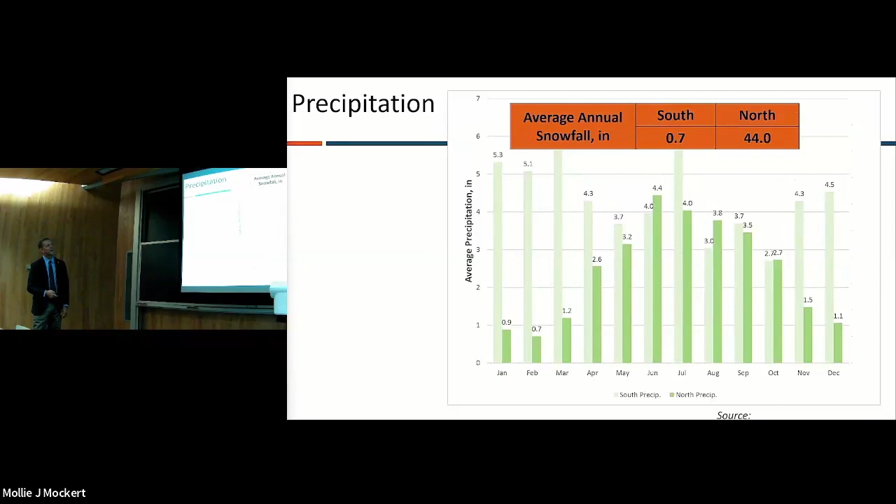Rainfall data, different rain conditions, and the snowfall of course is very different. And I'll just throw this out there: this is what is actually on the ground, and this is what we imagine is happening, because nobody is leaving their homes when we get a little bit of snow.

So future challenges: SMA, recycled asphalt shingles, reclaimed asphalt pavement, fibers, cold-in-place recycling. These are all things that when Dr. Newcomb was at NAPA, the industry was encountering every single day, and it was his job to figure out how to handle these things, how to incorporate them in an environmentally responsible way that doesn't sacrifice pavement performance. He literally worked on all this stuff. The challenge we have is how do we bring those things into programs like MnROAD and MnPave.

So I mentioned at the beginning that this is an incomplete history, and it's incomplete because the story is still being written. Dave believed very much in mentoring and working with young people, whether in scouting, his private life, or professionally. There are just so many people who could have come today and told the story I told, because he had a really profound impact on people.

He had a genuine interest in those around him. He had a genuine interest in helping others succeed. He was always the first person to push you into the spotlight. And for that, I am ever grateful.

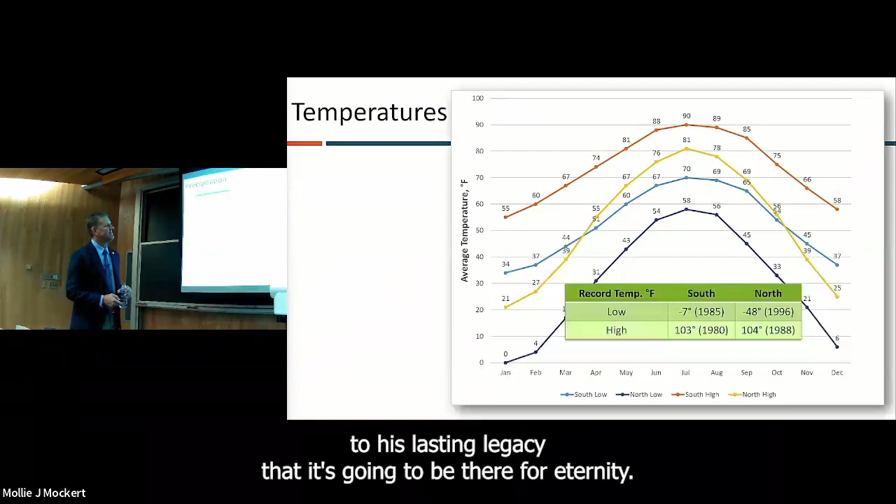I was very taken with the opening of your presentation on Dave, which I thought was glorious, by the way—Dave, you did a terrific job. So if you looked at Dave's academic route, it traced out an infinity sign. I think that's a testament to his lasting legacy, that it's going to be there for eternity. But I just felt that was an observation I had, that it was in the mathematical framework.

He literally touched all parts of our country, especially in his role at NAPA. I was fortunate that when the perpetual pavement stuff was getting going, he and I would go out together and teach short courses to professional engineers and practitioners, and we got to spend a lot of time together. It was amazing to walk into a meeting with him - everybody instantly knew who he was, and he had instant credibility. Lucky for me, some of that credibility rubbed off - I fell within the blast zone of his credibility, credibility by association. I think others experienced that too - he had a way of bringing people together, with the technical knowledge and expertise to convince them of whatever he was trying to convince them of, at his immediate disposal.

Any other questions? Oh, yeah, Dave. Hold on, just a second.

The article they did on him in the U of M Daily - the reporter was up on that bridge that's probably no longer there, covering live traffic. We were standing on the curb and I handed him a pressure cylinder. I said 'go,' and he went out there, she took a picture, and I said hurry up - it was live traffic, though it wasn't very heavy back then. That was at the start of his time here, right? Right, yeah.

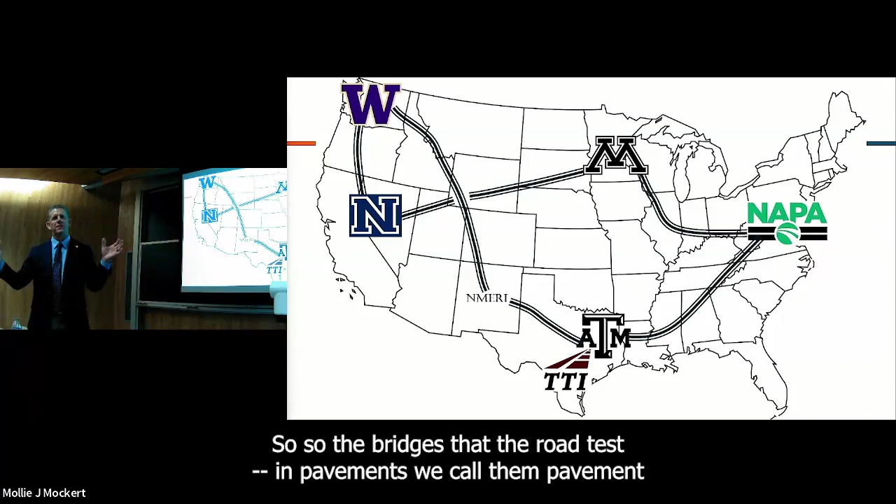So the bridges at the road test - we called them pavement connectors, not bridges. But they were about that high off the ground. I mean, it was a span, but it was a relatively low-slung bridge, because it was tied in with the elevation of the pavements. Yeah, interesting. Any more questions?

I just want to thank Dave for what he said - you captured David perfectly. If he were here, the first thing he'd do is insult Mike Simmons. And he would apologize about the potholes, but he would also remind you that he always considered them job security. That's right. Thank you, Margot.

Any other questions? If not - I think the second thing he would do after this is go talk to the young engineers in the room, ask them what they're doing and what their career plans are, and maybe try to recruit them into pavement engineering if they're not already there. He really believed young people are our best hope for the future, and making sure they're properly equipped, educated, and trained. It's a big job we have ahead of us across all areas of our infrastructure. I can say with some confidence we've never gotten any converts from the environmental area.

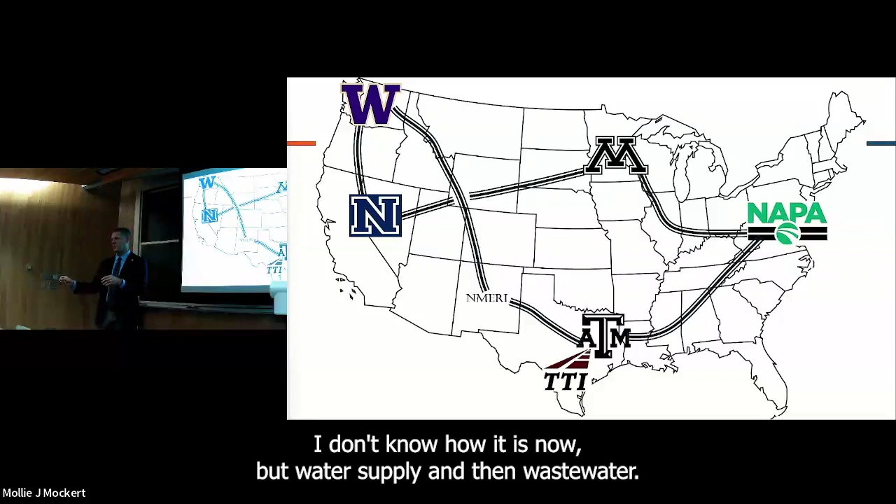So when I took your water supply class, it was when we were on quarters. Water supply and wastewater were a 1-2 punch. In water supply, I thought this was really interesting - I could see myself doing this. We went on a field trip up to where water comes out of the Mississippi to be treated, and I thought this could really be great. Then I took class number 2, and we went to the St. Paul water treatment plant, and I thought, this isn't for me. It was impressive engineering, but with 26 million gallons a day of sewage flowing through that facility, I just kept thinking, does anybody else smell that? This is really something. So you almost had me.

Okay, thank you. Thank you.